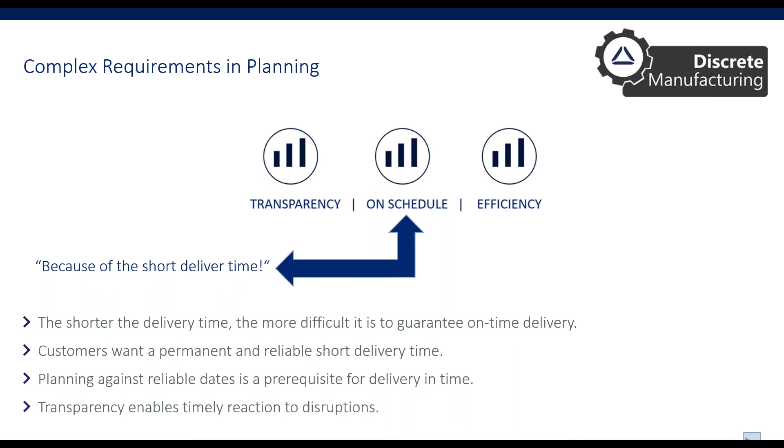When we see efficiency, efficiency is very close to price, because a low price requires an efficient production, and an efficient production allows a low price - that's vice versa. And transparency on capacity utilization increases the efficiency potential.

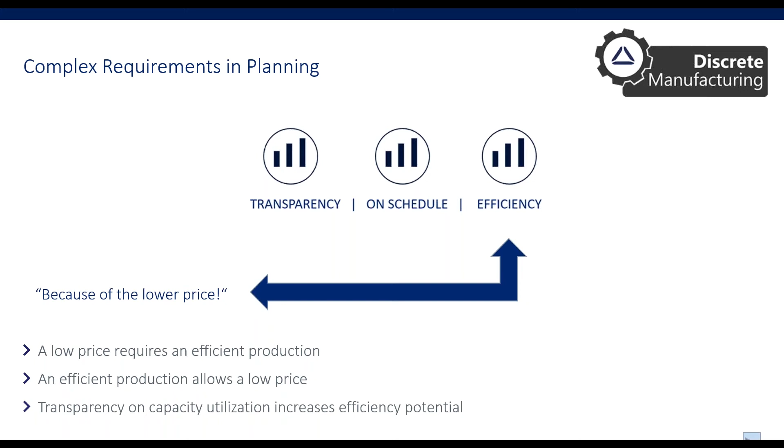So now we have some typical problems in planning. I think it's like an iceberg - normally we just see the peak, and the production planner has to work with some parameters. He has the inventory, information about available capacity, information about lead time coming from routing plans, and a couple of planning parameters from the ERP system: stock, capacity, lead time, minimum and maximum stock quantity, different reorder policies, and so on.

But under the waterline, there are the real problems. He has to deal with incorrect bills of materials that cause wrong inventory. Dates are often changed by the customer, or other departments are not able to meet their dates. Rework is not considered enough. Absences of employees, unexpected machine breakdowns, and of course, very popular, quick shots - all of this disrupts the production.

Normally, the planner reacts to this unpredictable situation by releasing orders as soon as possible, because he thinks that when he releases the order as soon as possible, it's safe and everybody will take care of his production order. He also works with buffer times, so to avoid material not being right in time at the machine, he uses buffer time, thinking other departments will then have enough time to make sure the material is there.

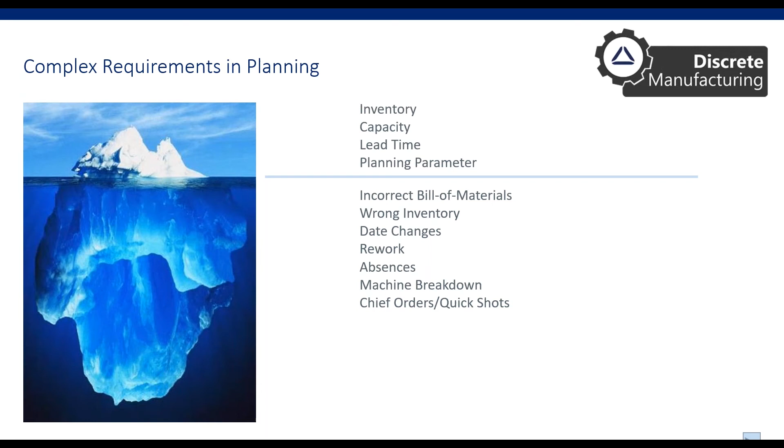He changes production lots on his own authority, because he says, normally I have to produce 5, but if I produce 10, then my production runs smoother and I get a better output. Or, for performance reasons, if he has a couple of production orders, he takes care of his favorite parts, because those are the parts where he can achieve better output and better efficiency. So on top we have what we see, and under the waterline there are a lot of unexpected and unpredictable things.

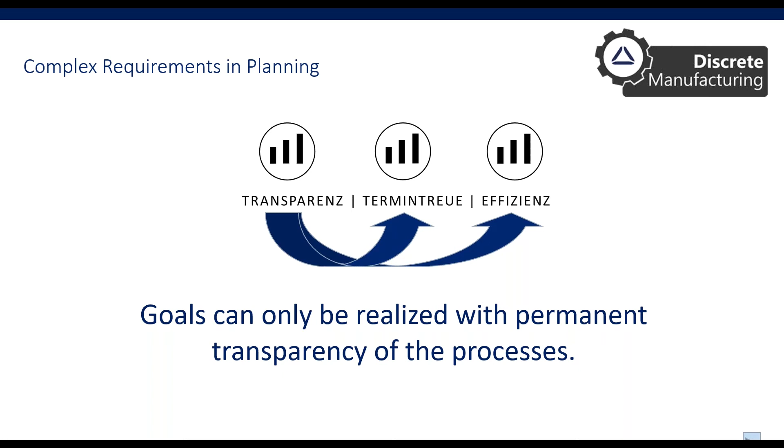But overall, goals can only be realized with permanent transparency of the processes. And of course, it's important to go away from Excel and to have all data in one access.

So let's have a look at the different planning strategies. Well known is, of course, the standard ERP planning. On the right side in the diagram, you see three production orders on three different work centers. Blue or dark is the work time, so setup time and runtime, and gray is the wait time or the transport time, so the not productive time.

The classical ERP planning, from my point of view, is a planning that is none. Normally capacities are not considered because the system plans against unlimited capacity. Now you can say, of course, my ERP system has the possibility to plan against limited capacity. But to be honest, if you try it, it works a little bit poor.

And this is the reason why other planning tools came up in the 80s or 90s. So it's a planning far away from reality. Mostly every ERP system allows scheduling into the past, which is not possible. It makes no sense if the system tells you that you had to order the parts a week ago to start right in time yesterday. So it's a planning against an empty factory.

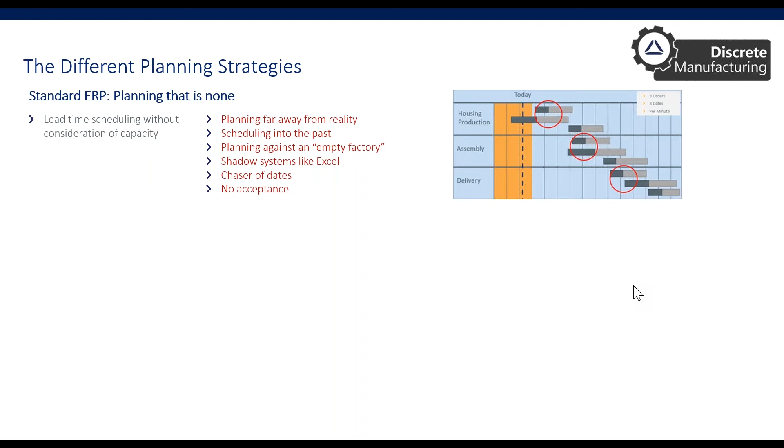Then, as I said, in the 80s or 90s, production planning systems came up. APS, Advanced Planning and Scheduling System, Production Control System, and they try to predict the future. It is a real detailed planning approach. It is a centralized graphical planning with the possibility to optimize and search for alternatives if something went wrong.

In the background, there's an algorithm, a high mathematical algorithm, and this causes a black box optimization because nobody is able to understand what happens in the background and what the result is, and nobody can explain the result. And if you ask a consultant for one of these systems, they're even mostly not able to explain the result or why the system made a proposal for this production planning.

It is a minute by minute scheduling, and if there is just one small disturbance in the production, it disturbs the whole schedule and requires a complete rescheduling. There's no room for maneuver, so nobody in the system, from the worker on the shop floor, can make changes by himself, and there is no acceptance because he has no influence on the production planning. If a problem comes up, he gives the problem back to the production planning and says, hey, it's up to you, please solve my problem.

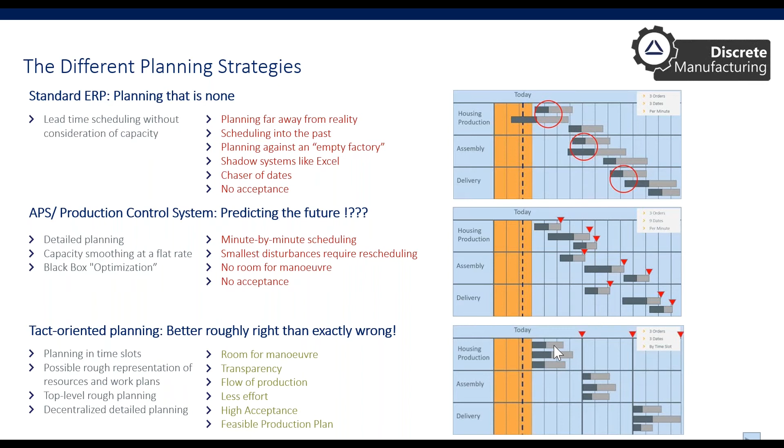If you compare with the APS planning, here we have 3 orders in the system, but we have 9 dates to consider. And if I change something here, it immediately has an effect on the other dates of this production order. In the tact-oriented planning, I have enough room for maneuver. So if the guy on the shop floor decides to start with this order first, then with this, and then with that order, because that fits best to his production philosophy, it is okay for us as long as he guarantees that all 3 orders will be finished at this point in time.

So let's go a little bit deeper into the tact-oriented planning. What is it? At the end, it is a production system for discrete manufacturing, so workshop manufacturers, variant manufacturing companies, and so on. And it is a cross-industry project planning system, so it works for production companies and also for project-oriented companies. And it combines all elements of production planning, like the organization, responsibilities, rules, resources, capacities, etc., into a dedicated unit in the system, the CC tact-oriented planning.

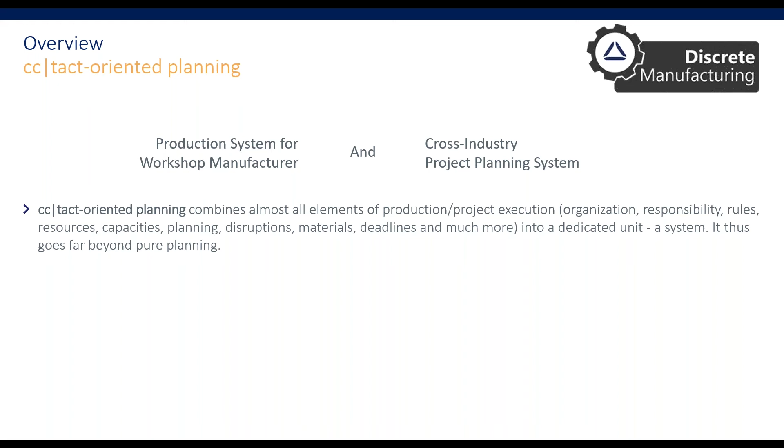And it is more than just a production planning system. It is a special philosophy. It enables the synchronization of all areas of the production and of all capacity in a whole organization. And it brings transparency to the typical goals, meeting the deadlines and efficiency.

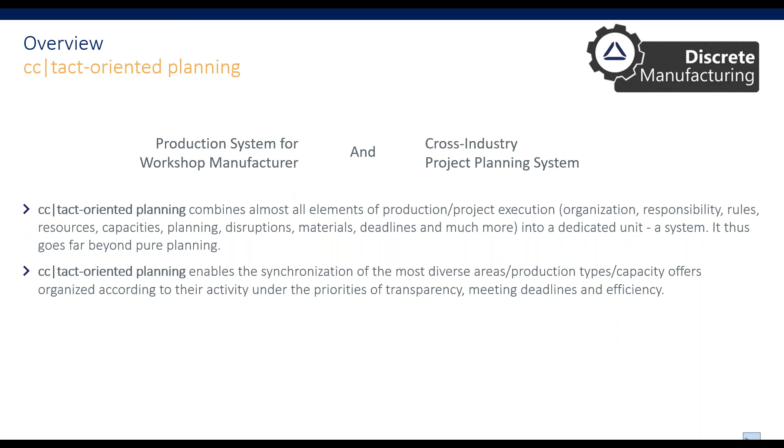Here, all employees work in one system, no matter what their task or role in the company is. So we have some examples from the order management. This is a typical centralized planning, with all production orders at a glance. We have the real-time planning for the salespeople. If there is a quick short order, they can do the production planning directly and check what is the first possible and really feasible delivery date. We have a view of the capacity management.

For the management, we have information about the long-term capacity planning. Does it make sense to hire new employees or to increase the capacity with different options? I have my decentralized detail planning. And of course, I have a shop floor management system where I give key performance indicators to the people on the shop floor so that they can make the decisions for the detailed planning on their own.

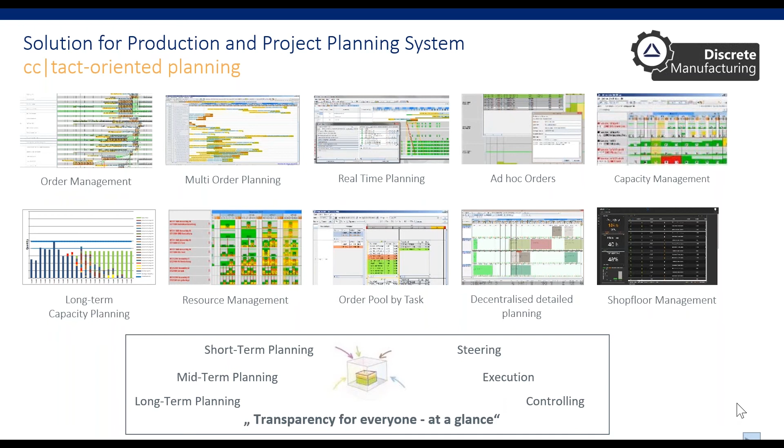Now we have looked at the basic principles of the tact-oriented planning. What we are doing is planning in fixed time grids. That is what we call the resource tact. Like you can see here, we have on one capacity tact 1, tact 2, tact 3. And when we are finished with all orders here, we bring them to the next tact and then to the other one, with also the possibility to skip a tact in production if it is not possible. So this gives the guys on the shop floor the room for maneuver for processing and handling the work.

We define together feasible capacity limits, that is the tact for each department, and we define a degree of flow throughout the entire value chain. So we make sure that we have a really smooth flow of the production order through the production. And we make a coarsening of the planning. So we don't do a detailed planning based on machine centers, persons, and whatever. The planning is on resource groups, teams, and machine groups. And we trust that they can manage their work inside the team or the resource group.

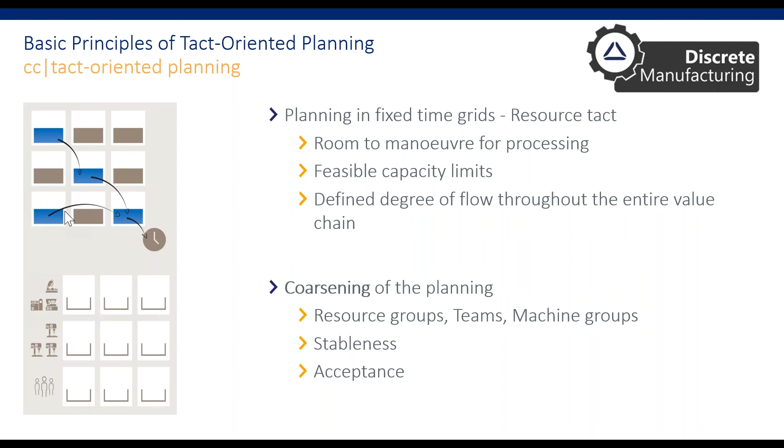This all brings stability to the planning and acceptance from the guys on the shop floor, because they are responsible for their own production planning. So here we have a view of the flexible capacity model. It's very simple. It's like a traffic light model. The green area on the left is what we can normally do. So I say I have 3 people in my production area and they work 8 hours per day.

So I have a capacity limit of 24 hours a day. And without any problems, I can load work in this tact until the 24 limit is full. Then I have a small area between green and yellow. This is what I can organize by myself inside this team. This is if I spend 1 hour overwork or make an additional shift or whatever. That's what I can do and decide inside the team.

So that means for the production planning, if there's a peak in the production, normally I plan everything up to the green level, but in some cases I have no problem to go up to the yellow level. It is not the standard, but it is possible. And of course, I define a red area, and I should never plan over the red area because this is a total overload, and then I have to escalate this to the management.

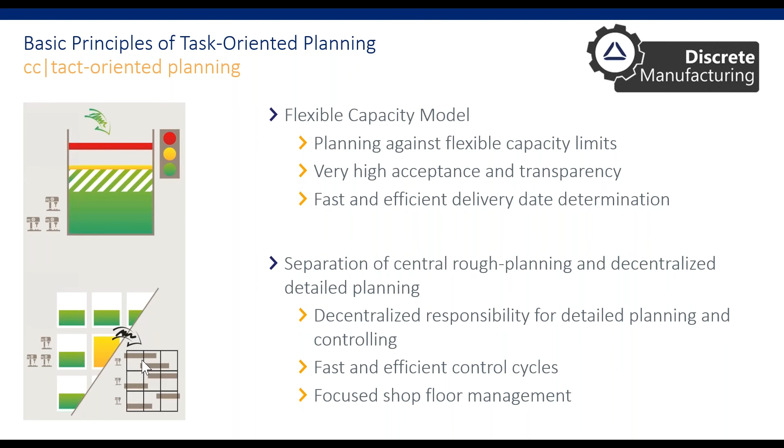And fast and efficient control cycles will be installed. That means if a problem pops up and I come to my yellow or over my yellow level, then I go back with a loop to the production planning and we install communication loops here. And we are focusing on the shop floor management, and this means we're focusing on the problems and not on the normal production planning. So here we have a typical cycle for this.

Here we are on the planning level. This means I have my tacts with a capacity limit. This brings transparency to the production planning, and I can define realistic and fast promise dates. This means I just plan everything until I'm on my green level, and then I can calculate very easily my delivery time. And very important is that I have fixed dates internally and to our customer. So the first department in the production also has a customer, and it is the next department. And he must rely on the dates I deliver.

Then I'm in the task list, in the work list. Now I'm in the view of the department. I receive a work list, and if I'm in the green area or in my yellow area, the work list is agreed as fixed. I have, of course, a possibility to breathe with my capacity a little bit, so I can use some overwork or whatever. And if I have problems, it's very important that I install a timely and proactive communication. And here I have the decentralized detailed planning.

So that means I decide the sequence of my orders. For the people on the machine, it means the date is fixed. They know all tasks in the work list, and the date for all these tasks is fixed. And there is a priority. At first, they focus maybe on a backlog, then on the current tact, and then on the next tact. And there are predefined escalation mechanisms. So if something went wrong, they know exactly what to do.

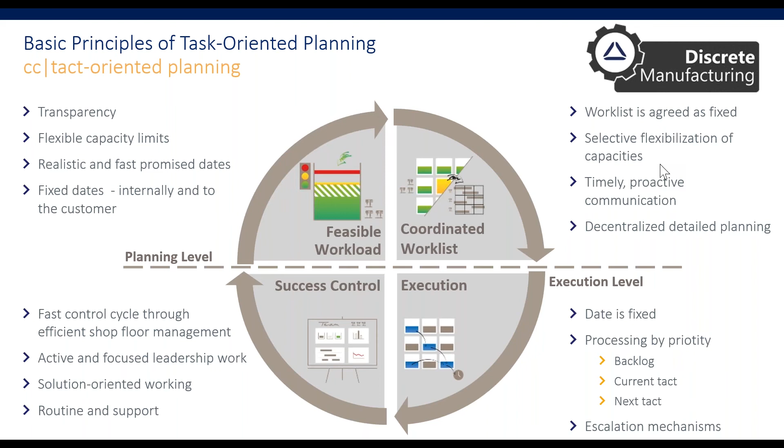Now you can say, hey, that looks a little bit like lean or agile or something like this. And yes, you're right. With the tact-oriented planning, we have the basis so that we can work a little bit like with agile principles in the production. So the tact could be the sprint we have. And we have the full flexibility inside this production tact. So this is Scrum.

We can combine it with lean management functionalities like Kanban or no orders released too early. We have methods of the critical chain project management, the CCPM, with prioritization on dates, no multitasking, harmonized capacities. And of course, the management principles, CONWIP, pull, we work in sequence, and of course, a setup optimization here.

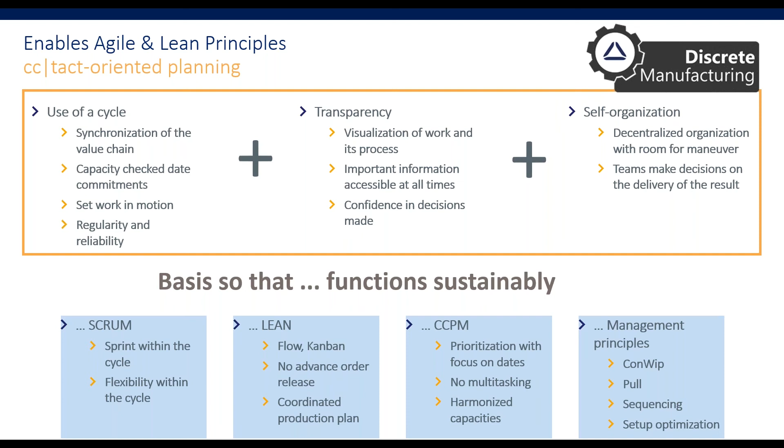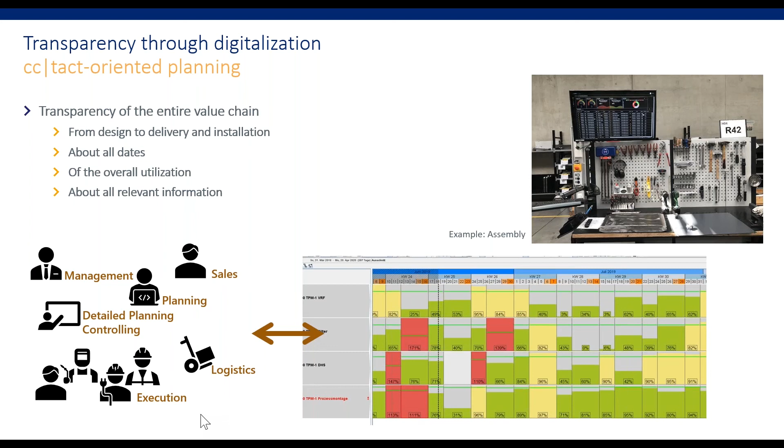Here we also have information we deliver. So for each production order, all related information like drawings or other stuff can be attached to the production order inside the tact-oriented planning. So we really have paperless work, a paperless production. We have a workflow mechanism integrated. We have historical data and everybody can use the data.

So we see the backlog, we see the actual workload, and we can see the planned workload for next week. So all information is there and transparent. So the guys at the machine and in the production department can make the decisions on their own. It's no longer the job of only one production planner.

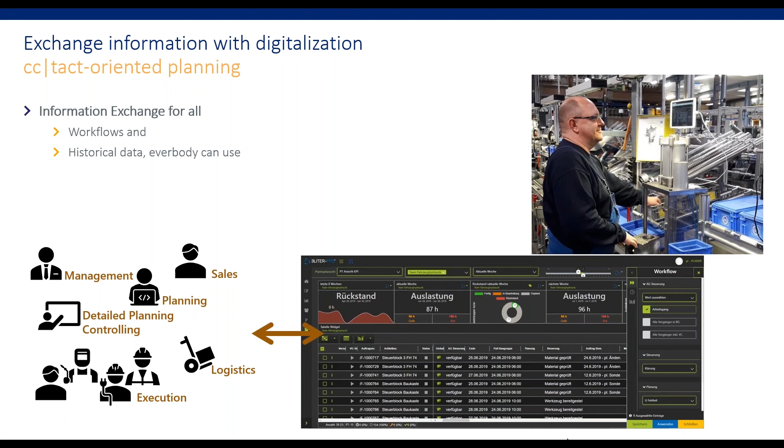And let's go a little bit into the white collar area. Here we have a typical example for the engineering department. So it's also possible to include engineering in the tact-oriented planning. So it's not only, as I said, a production planning system. It helps for the entire order process in a company.

So detailed planning, as I said, is possible, but it's not strictly required. If I don't have too many orders or the orders are too big, like in the technical department, it makes no sense to do detailed planning if I have only 2 tasks on my table because I work on each task a couple of days. So here, for instance, I can decide it on my own.

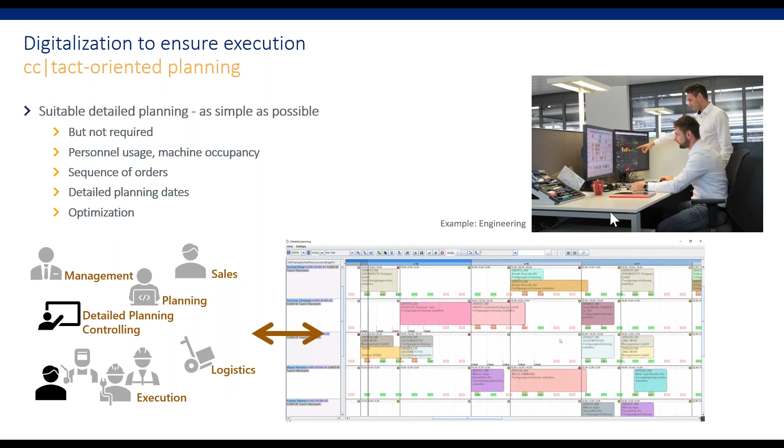I have information about my personnel usage, so which engineer is working on which order, or if I go back to the shop floor, what is with my machines. I can define a sequence order. I have the detailed planning dates. I can use it, for instance, for picking, I can do the optimization, it's a graphical overview, and I know all about this information.

Now, I said we can combine it with classical principles like the pull system or Kanban. And what is important is we never push production with tact-based planning. So nobody pushes material into production, because our goal is to reduce the stock and the work in process. That means I pull everything I need, and this is Kanban.

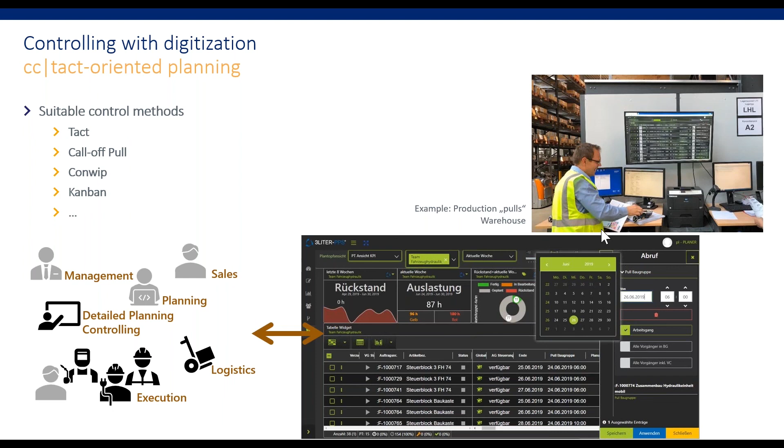So here we have a picture of a guy in the inventory, and he has on his screen a list of all orders, and he can scan the orders directly from the screen, bring them in order by call-off date, and create a paper list, a picking slip here. And here we have a picture of how it works.

So on the shop floor, it's always based on deadlines and realistic planning. We come together after each tact and speak about actual utilization. And we always ask 3 questions. Question A, is there a backlog? And here we consider the capacity and the availability of the capacity. The second question is, will the current tact be finished in time? Yes or no? And then we ask, what about the future? Will the next 3 tacts work smoothly or not?

If we speak about these 3 questions and everything is fine, we stop the meeting immediately and go back to work. If not, we ask for actions. Are any actions already initiated or not? If not, actions will be defined. And then we ask, is support needed or can we solve the problems on our own?

And if support is needed, the supervisor escalates it to production planning or to a leader or to the management, and the responsible persons must support solving this problem immediately. This is the way it works with tact-oriented planning.

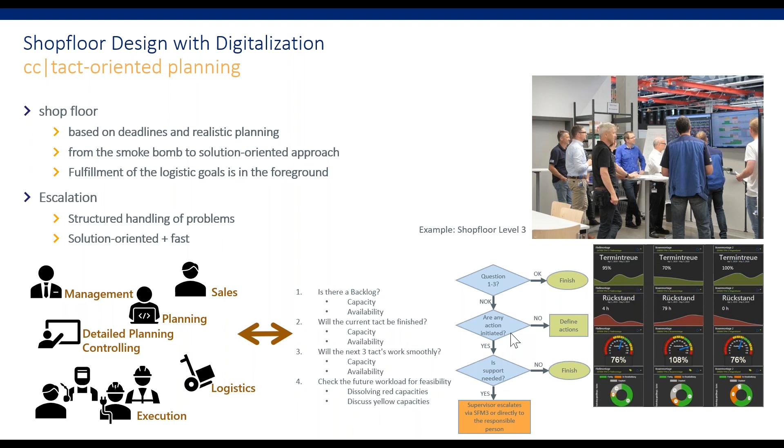Here we have an overview of the slides I showed before. It's about management. The management has qualified information. He doesn't have to rely on an APS system with funny results. He has information about the long-term capacity planning, and he can make decisions increasing or decreasing the capacity. And he receives key performance indicators for the whole company.

The leadership, the production manager, can focus on the important thing. It's solving conflict situations. And of course, he also has KPIs and information about the medium-term capacity planning. For the sales, there are also advantages. Information is directly available. One look in the system and he knows when this order will be finished, and he has a reliable delivery date. He can provide the customer with all necessary information.

And of course, there's a possibility to make decisions at the project level. So if a follow-up order pops in, he can do a planning about this, and then he can decide what order is more important, the new one with a delivery maybe in 6 weeks because there's no capacity, or do I want to scrap an older order in favor of this new one? But he has no more troubleshooting to do, calling the production, calling the customer, and handling all the things. The planning can act instead of react.

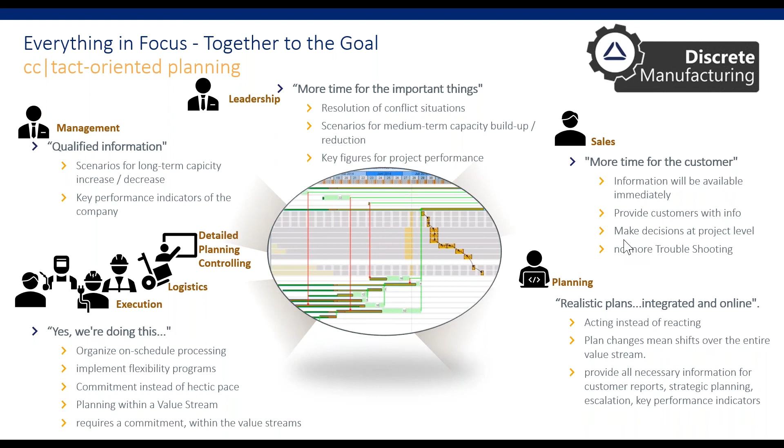What are the benefits of the tact-oriented planning? Of course, it is the base for sustainable success. The precondition is that the logistics must be fit, and of course, we must define a capacity limit, and we have to move everything from the push principle to a pull principle and bring everything to a flow, to a smooth rhythm everybody can follow in production. Then we have to follow the principles.

Central rough planning, more decentralized detail planning, and more responsibility for the departments in the production. The principles have to be implemented, and it is a cultural change. Normally, every company has a centralized planning, and responsibility for the people on the shop floor and a decentralized detailed planning is a cultural change for a lot of companies.

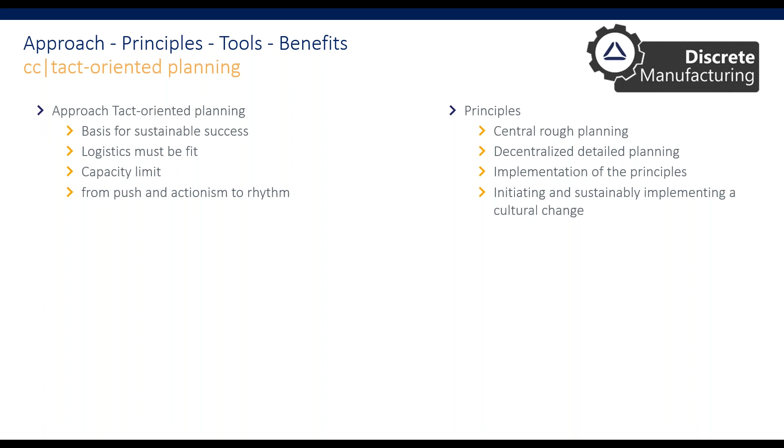And at last the tool, the software, our product, the CC tact-oriented planning, is nothing else than a tool that supports this planning methodology. So we have transparency over everything. We have robust, feasible, and accepted production plans. Important is that the system only makes recommendations, but the man on the shop floor makes the final decision. And the goal is to reduce the effort and to focus more time on solving the problems we have.

In hard facts, it means if we look at the last projects, normally we increase the output by 40%. At the same time, the lead time will be reduced by 50%. The on-time delivery, so that we meet the delivery dates we gave to the customer, increases to over 90% with better transparency over the whole process. The efficiency will increase by 30%, and through the cultural change, with better communication, efficiency in the whole company.

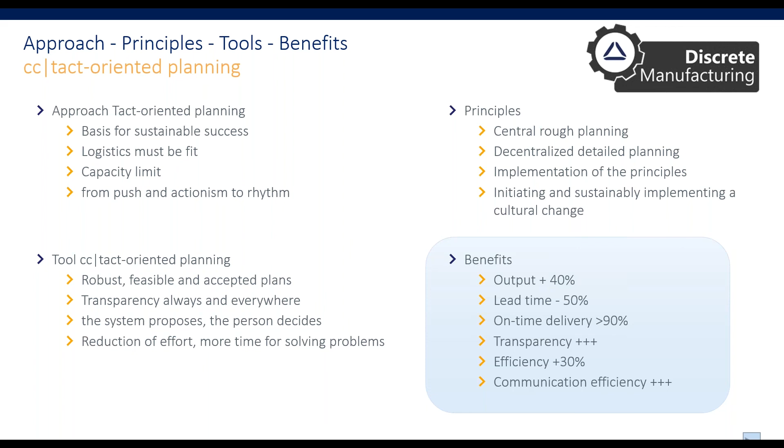Okay, now I'm at the end of this webinar. The goal was to give you a first impression of what is possible with the CC tact-oriented planning.